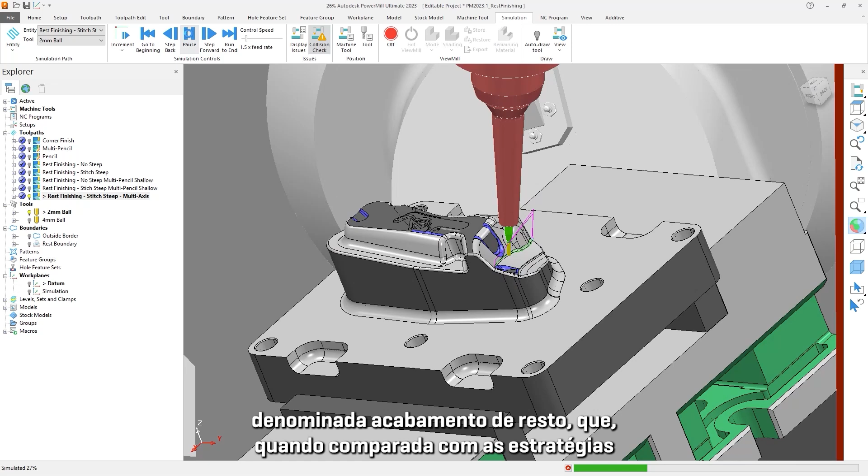Any excess material left on a part after machining is often tackled manually, and whilst there is skill and craft in this, it takes time, which can lower manufacturing throughput and can result in increased non-conformance due to part defects. In order to minimize this risk, Autodesk PowerMill 2023.1 has a new strategy called rest finishing, which, when compared to existing corner machining strategies, better identifies and machines excess material on your parts, reducing the need for manual polishing.

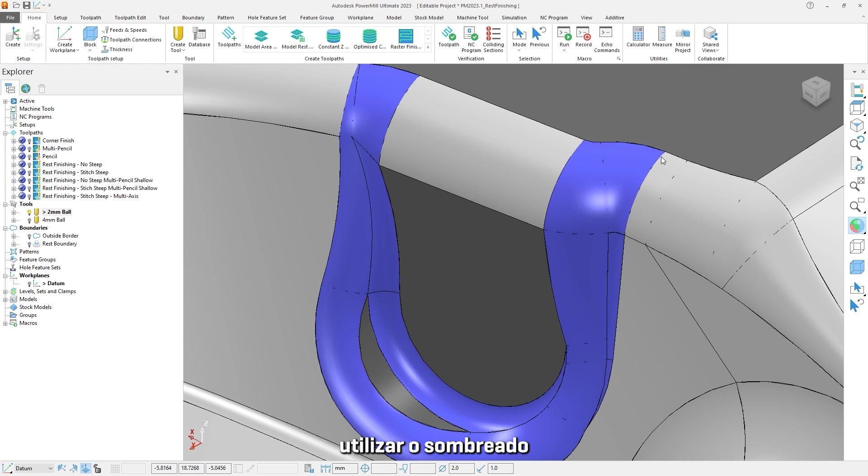In this tutorial, we have a model of a punch, and we want to machine the areas of the model with the smallest radius using the 2mm ball nose tool. The areas of interest have been coloured blue, but to clarify, we can use the minimum radius shading to show where we expect our machining operations to occur.

Let's switch on the minimum tool radius shading. Then from the View tab, let's select the additional options under Appearance and set the minimum tool radius to 2mm. Note how most of the model goes green, but some key areas remain red.

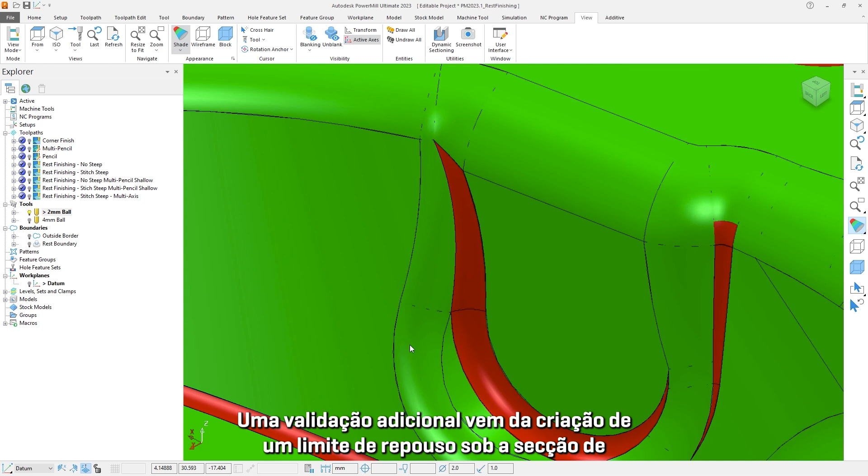An additional validation comes from creating a rest boundary. Under the Boundaries section of the Explorer, we have a pre-created boundary called Rest Boundary that uses our 2mm tool and references the larger 4mm tool. If we switch on the light bulb to display the boundary, we can see how the minimum tool radius shading and the rest boundary align, providing a clear indication of where we will expect to machine.

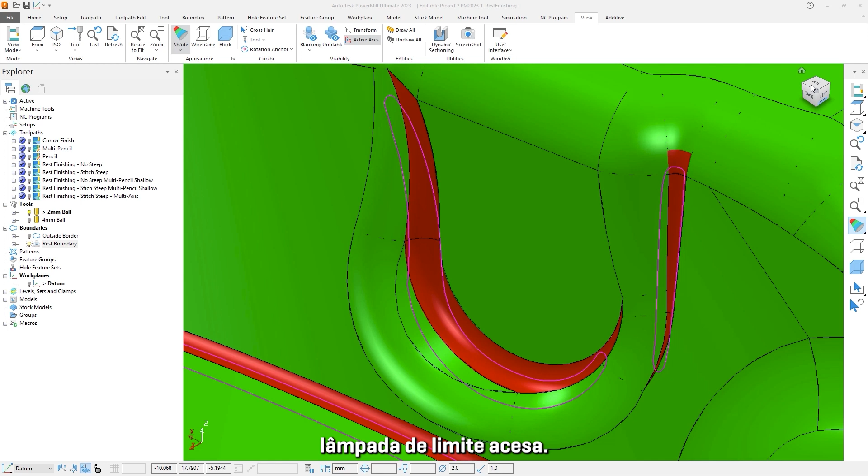Keeping the boundary light bulb on, let's switch the multicolored shading back on and look at the other toolpaths. In the toolpaths list in the Explorer, we have some pre-created toolpaths. Let's activate the corner finish toolpath. Note that the leads and links have been hidden for all toolpaths so that we can focus on the toolpaths themselves.

Zooming into the various regions of the model, we can see that whilst the corner strategy has produced toolpath in many areas where we expected toolpath to be, it has stopped short in some regions and even missed other areas that the rest boundary found. This is not ideal as it potentially leaves excess material on our part.

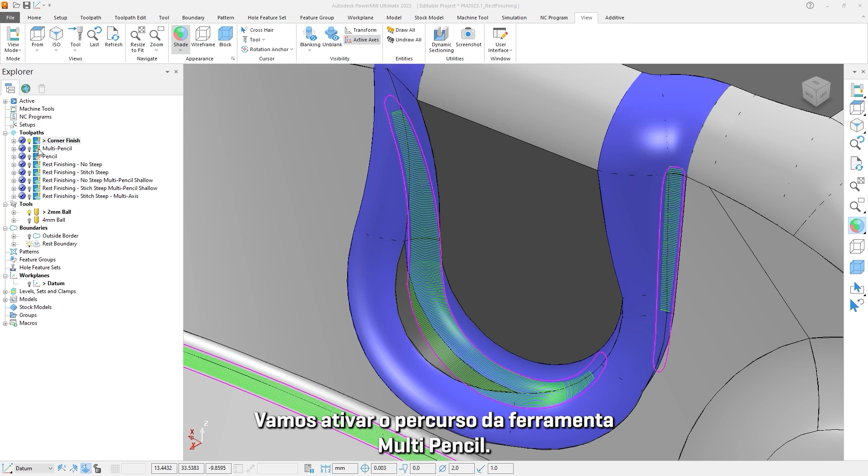Let's activate the multi-pencil toolpath. This toolpath, when compared to the corner finish toolpath, does do a better job of machining some of the rest boundary, but this is more a product of the nature of the multi-pencil to overcut everywhere, which can be clearly seen by the amount of toolpath outside of the rest boundary.

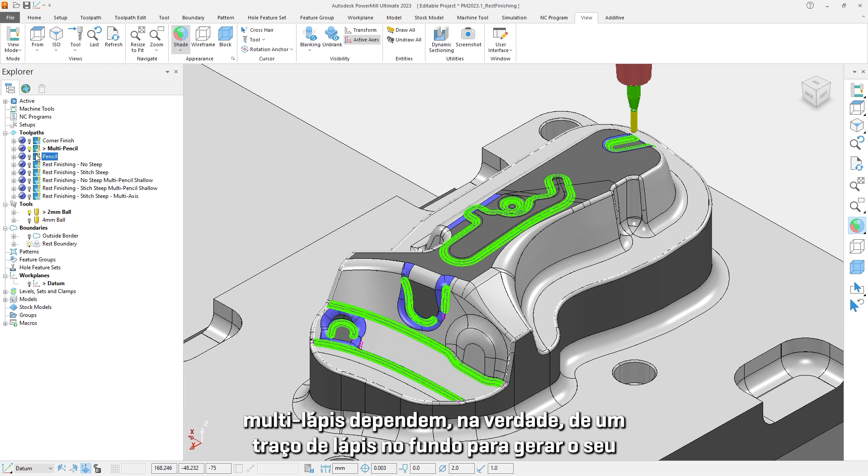And despite this, there are still areas that the multi-pencil did not machine. The reason for the missed material is that both corner finishing and multi-pencil actually rely on a pencil trace in the background to generate their toolpaths. So any areas where the pencil trace cannot be created, seen here if we activate the pencil toolpath, will result in no toolpath being produced in those areas for both the corner finish and the multi-pencil strategies.

The new rest finishing strategy is different. Firstly, it uses a rest boundary calculation in the background to establish the regions to machine. The benefit is that more material is discovered compared to the corner and multi-pencil.

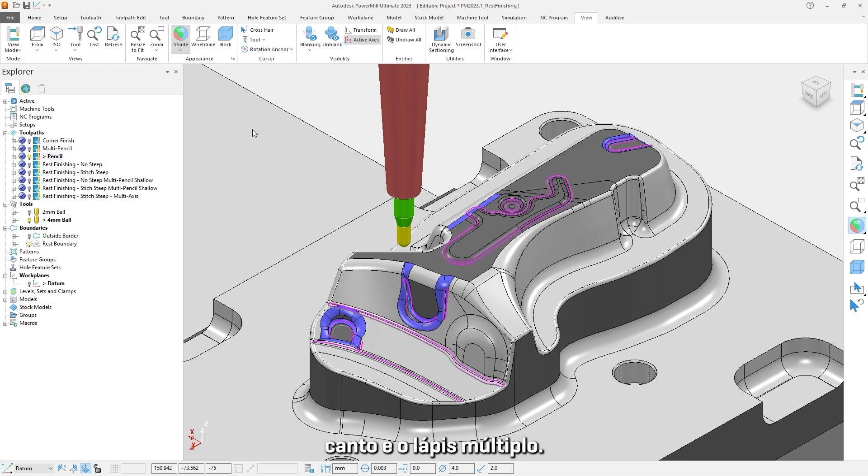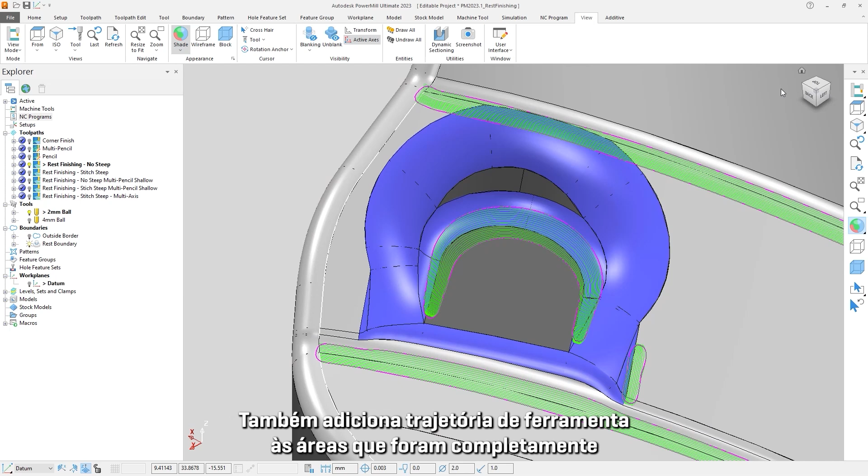Let's activate the toolpath named Rest Finishing No Steep and zoom into one of the areas which was missed by the previous toolpaths. Activating the other toolpaths and comparing, we can see that the Rest Finishing toolpath extends the areas to be machined, filling the rest boundary areas where the other toolpaths stopped short. It also adds toolpath to the areas that were missed completely, resulting in a more comprehensive coverage of the rest material defined by the rest boundary to produce a better part.

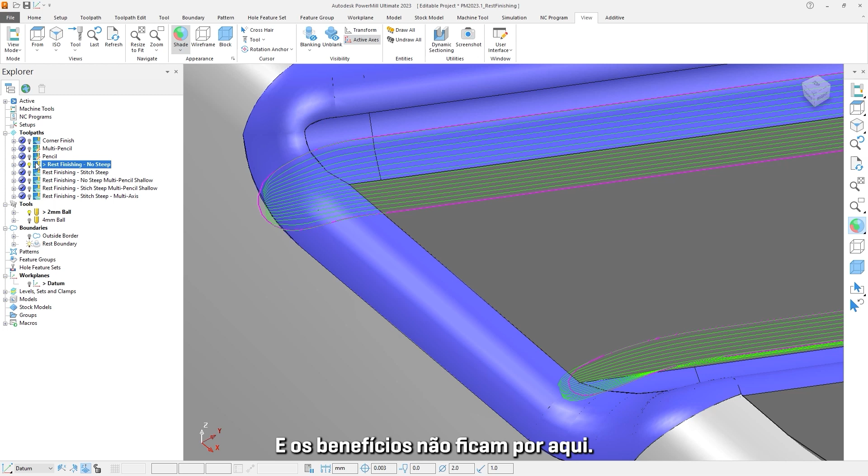Looking around at the other side of the part, we can also see an improvement in the quality of the toolpath passes for the rest finishing when compared to the corner and multi-pencil. And the benefits don't stop there. There are a range of options within the toolpath form that let you have more control over the toolpath output.

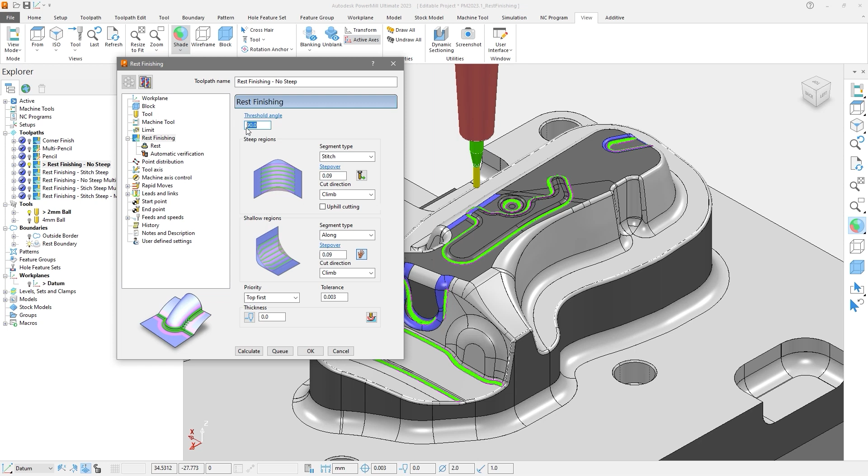Let's open the toolpath settings, hit the Recycle button to unlock the form and go to the Rest Finishing options. Like corner finishing, rest finishing has steep and shallow controls, with a threshold angle to define the split between the regions. But there is more flexibility, meaning you can vary how the part is cut depending on whether the area is steep or shallow. There is individual control for the step-over size of each region, as well as an option to engage uphill cutting on steep corners, which can help minimize tool vibration and reduce the chance of the tool pushing off from the surface to be cut.

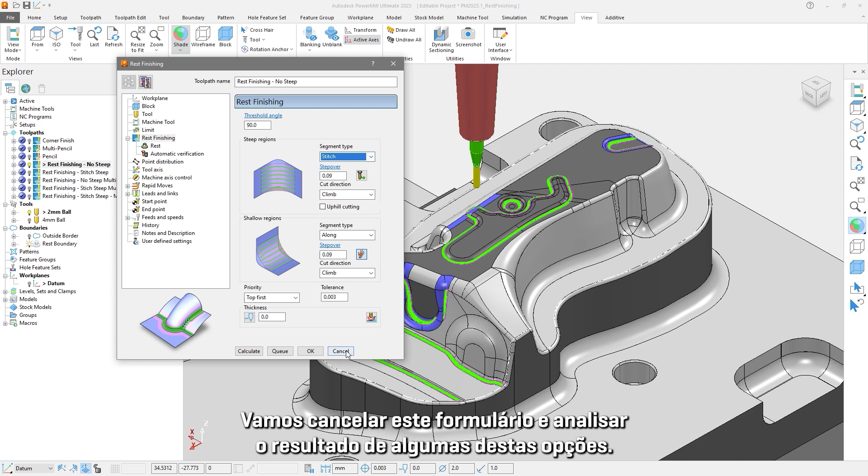Rest finishing also offers options to individually control the segment type for both steep and shallow regions, with options for stitch, along and multi-pencil, and none if you simply want to omit that particular region. Let's cancel this form and look at the result of some of these options.

Note that this first toolpath has a 90-degree threshold angle, and so the shallow region option to cut along is used for all parts of the toolpath. This will result in a toolpath with a shorter cycle time with fewer retracts.

Activating the toolpath Rest Finishing Stitch Steep, we can see this is using the stitch option on the steep regions. Now this can help lower the tool load, but can take longer to machine due to the number of connections required.

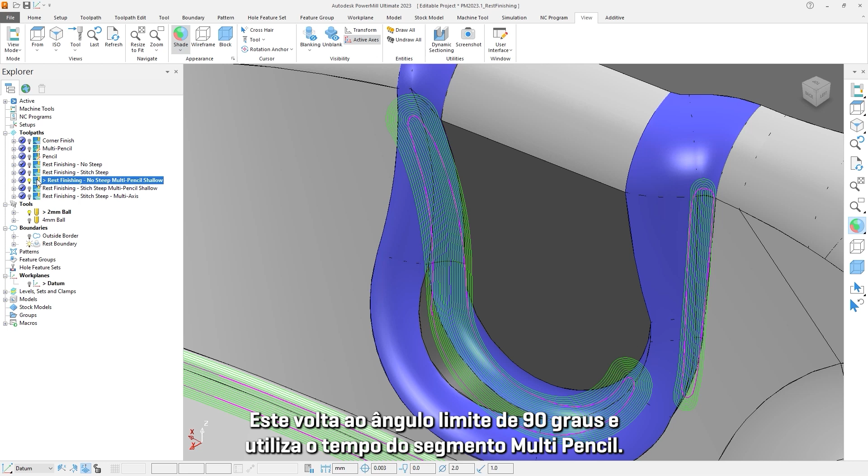Let's activate the next toolpath named Rest Finishing No Steep Multi-Pencil Shallow. This returns to the 90-degree threshold angle and uses the multi-pencil segment type.

Whilst this segment type still overcuts outside of the boundary, if we switch on the light bulb of the previous multi-pencil strategy, we can clearly see that as well as recognizing more rest material, the rest finishing also machines the steeper areas more efficiently. Let's switch off the light bulb on the multi-pencil toolpath and activate the next toolpath named Rest Finishing Stitch Steep Multi-Pencil Shallow.

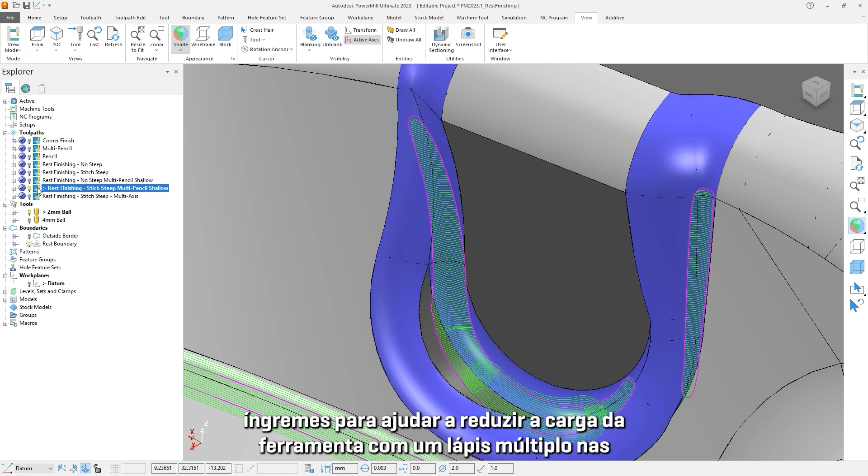This toolpath combines the stitch segment type in the steep regions to help reduce tool load, with a multi-pencil in the shallow regions that blends the overlap, something that was previously unavailable from a single toolpath.

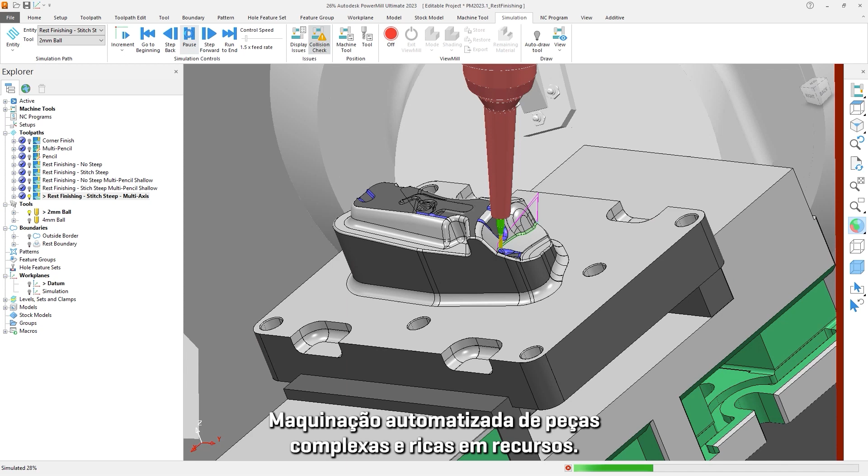Of course, there are other combinations that can be used which were not covered in this tutorial. But what's clear is that the new rest finishing strategy in PowerMill 2023.1 provides you with more toolpath control and aids the automated machining of complex feature-rich parts. Ultimately, this will reduce defects and improve part quality, reduce the need for manual polishing, and increase your manufacturing throughput.